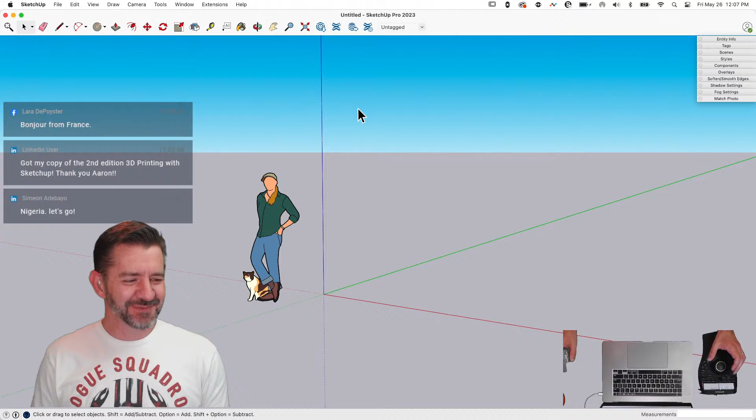So I have some imagery, 3 pictures I found that I'm gonna use as reference. I'm gonna go File, then Import, and grab this one. This is my main one, so I'm gonna import that and make it nice and big. I'll scale it in a second. This is the one I also shared on the forum, forums.sketchup.com, you can grab this file if you want. This is the main one I'll be working off of, it has all the vertical measurements and the shape of it, so we're going to work off this primarily.

I do have a couple others. Keggy just posted a picture of himself, but that doesn't help very much for modeling, though it's a good picture. You can take a picture from the needle, so we'll have to at some point figure out where inside the tower this picture was taken after we've modeled it, using Match Photo from the interior to line up that window.

So this is one of the ones I want to use, this would be the primary one. I think I'll get a lot of the geometry from this. And then I'm going to import the other one too. I'll just import all 3 of them and throw them on the ground right here. Is this guy right here.

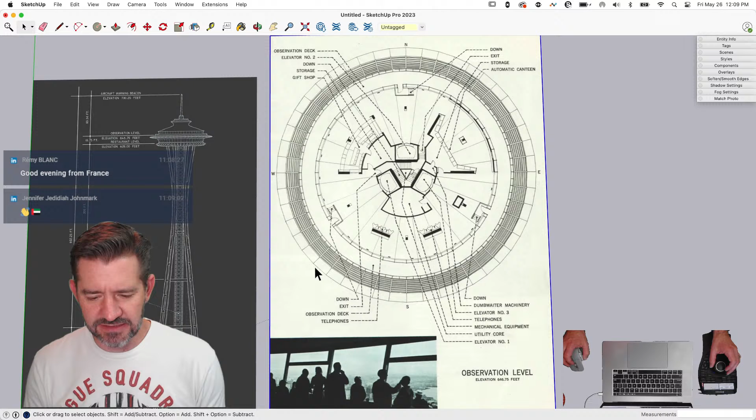So I grabbed this style, not because I want to go into this much detail, I'm not going to model the interior, but what this shows very clearly is the increments that make up the top of the tower. You can see the observation deck actually has, I think it's a 48-sided polygon, so I wanted to use that to create this geometry. What I really want to do is create a component, one slice of this, model it once, and let SketchUp do its thing.

And then it's three legs, right? So yes, literally you just do 1/3 of this. Exactly, so we'll do 1/3, and up here this will be broken into thirds, and each third will be broken into however many chunks there are. So I'm thinking ahead, I'm getting old and getting smarter, thinking about breaking this down into components before modeling rather than getting halfway into a model and somebody in the chat goes 'you could have done that with components.' I go, yeah, I could have, but how boring would that be?

Keggy posted another picture that might be more helpful. There we go, that's closer. So from there you see that little restaurant level right there, the little three-sided piece down towards the bottom. I learned that was actually added to the Space Needle in the 80s, and I happen to have a 3rd image which I'll drop here that gives you an idea of what that looks like.

You can see this was 1982, they added this, at the time it was the banquet facility, though I actually don't know what it is now. We didn't get to go in it, we looked at it, Matt and I got footage of it. I'm learning that when you go someplace to film, you end up filming instead of enjoying the place you're at. So from about 2 miles away in a park, we got footage of the Space Needle and didn't actually go there. But we did learn that while we were there, it was celebrating its 60th birthday. So happy birthday, Space Needle.

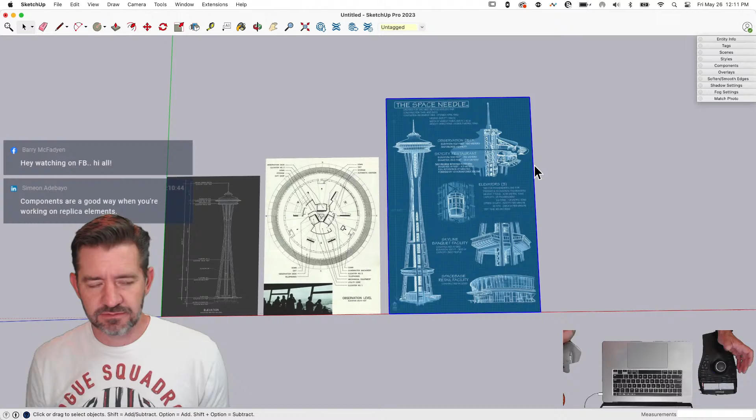Happy birthday. I mean, they have a birthday every year, so I guess you don't have to say happy birthday. No, you can say it every year. Happy 60th birthday, it seems like a big deal. Okay, I won't be standing that tall when I'm 60, tell you what.

So these are my images, I'm just bringing them in. I'm not going to do a watermark, none of these are big enough that I would want to model off a watermark. So I'm just going to bring them in, drop on the ground. I'm going to grab all 3 of them before I forget, and add a new tag called ref, because that's what I call it. I'm going to take all 3 of these and add them to that ref tag, that way I can toggle that off as I'm modeling and get rid of those images.

They don't look like the same scale. They are not, so let's deal with that at a glance right now. So this one over here, I'm not really worried about scale, it's all kind of isometric view anyhow, I just kind of wanted this for reference, so I'm not going to worry about this one so much. So I'm just going to put you over on this side. These 2, I want to get to the same scale so I can actually work off of them.

So there's no dimension here, so I'll start with this guy. So this says 602.25 feet. And that's to the tip of the needle. From the tip of the needle to, is that to here or to here? Wait, 100 plus 300 is 400.

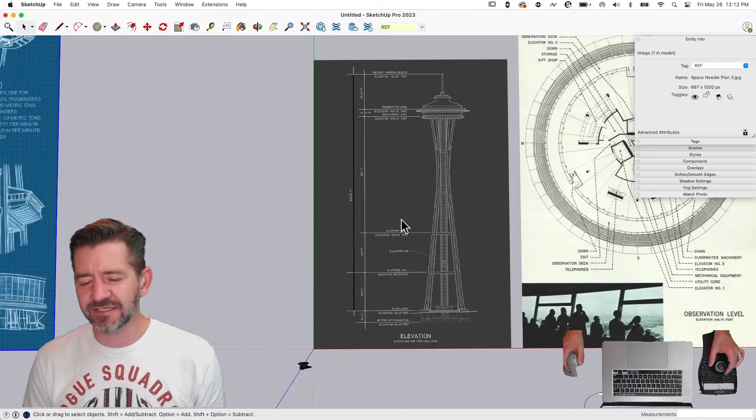Look at you doing math. Oh, so that's, they have a little dot here. This is not supposed to carry out, that's supposed to go to here. So from here, yeah, sometimes I accidentally do math and I'm like, oh, my whole complaint about how I can't do math just went out the window because I did it. Well, at least you're doing it poorly. That's true, yes, maybe. Yeah, I'm ballparking, but that was actually called estimating and not mathing. Oh yeah, estimating sounds more professional. It does, it also is lazier than real math.

So Mamba77 is wondering if you're going to do the rock and roll building next to the needle, and Kagi is also wondering if you're going to do the EMP museum. Or did you go to the EMP museum? I don't even know what that is. Electromagnetic pulse? Do you like go in there and it immediately fries your electronics, you get all that pesky data off of your working device, go away? No, I'm not going to do any of those things. Thanks for asking.

Nice, what? Thanks, this 600-foot building's not enough. Oh, all right, I'm going to grab this line I just drew, EMP actually, so I'm going to grab all this stuff and make it into a group because I want to scale this image and not everything else. So now I can come in here.

I can, what was that? 102.25 or 602.25. So I'm going to put a dimension on that edge, call it 602.25 feet. Yes, scale that group. All right, so there we go, that looks a little more appropriate.

By the way, the EMP museum is apparently the Museum of Pop Culture, now called the MoPop. Oh, I didn't get that out of, yeah, see that makes a little more sense, right? Heather's down there, right, nice.

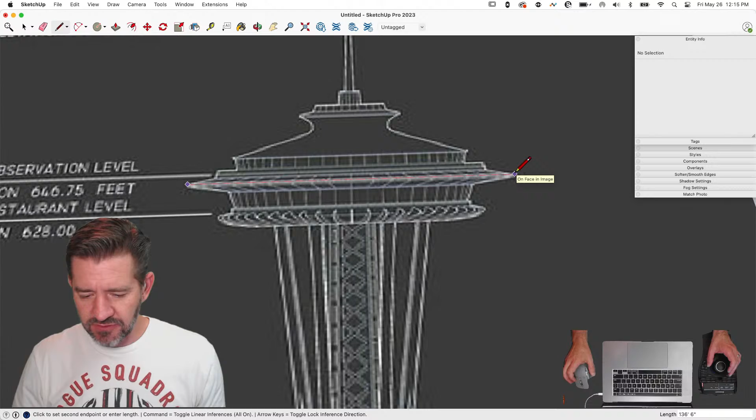136 feet across, so I'm going to come into this guy right here.

Take a line just like I did before. Was this off axis? It is slightly. Ooh, look at that. Okay, I'm not worried about that right now though. Need my edge, same thing. Grab that, make a group, go into that group, and then...

Wait, so that image shows that there's segments. It's not a perfect circle. Was this designed and built from a SketchUp model? Possibly.

All right, so if I do that and take this up here, I get a little Z fighting, but I should see... yep, same size. All right, these are the images from which my needle will be built.

You know what that means? It's probably time to do... oh, you don't have that button. I don't have that button. Save, I can try and save. I guess I could try that.

2023, to differentiate from the one I built in the past. All right, let's start doing some modeling. All right, so I want to put this on a base.

I don't have good imagery of what this base actually looks like, so I'm just going to put it on a circle that's the same number of sides as it is here, and then I'm going to break that into thirds. So if I come look at this, I got 1, 2, 3, 4, 5, 6, 7, 8, 9, 10, 11, 12. So yeah, 48 sides.

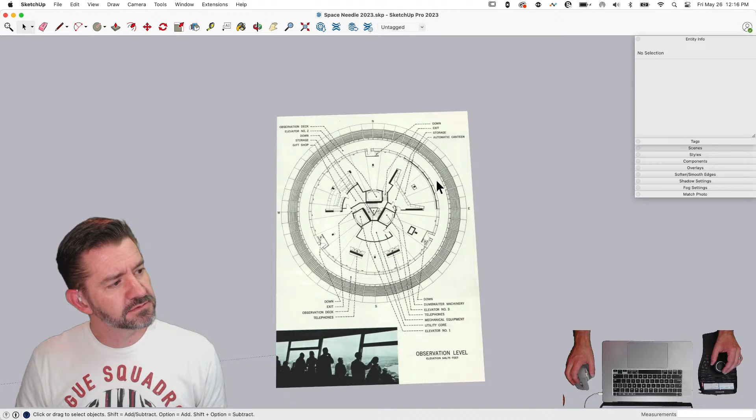That's good because that's divisible by 3, that's what I was trying to do. Thanks for mathing that at me. Well, that's just 24 times 2, so we already knew that. We're good there, right? It's divisible by... because it's divisible by 9. No, it's not divisible by 9. Man, messing me up.

All right, I'm making... yeah, it's divisible by... 16 foot edge. I'm just going to pull it over here and make a circle. It's 48 sides. Boom. Go to the center, pull it out to the edge. There's my base, that's right here.

We'll drag that down from here to about here, and then I will pull that down, I don't know, some amount. All right, not really that concerned about that, to be honest.

All right, so what I'm going to do now is I'm going to divide this into 3 sections, so I only have to make 1/3. So I'll grab this, grab from the center. I could count how many spots over that is and then draw an edge there, or I could just grab this and say, I know that 360 in thirds is 120.

And that's not math, that's just a thing I remembered. And I'll type 2x. That's like you saw it on a chart somewhere or something. Maybe my daughter's homework, or I don't know, maybe you used your gazintas went all the way up to 120. Odds are against that kind of retention, but it could happen.

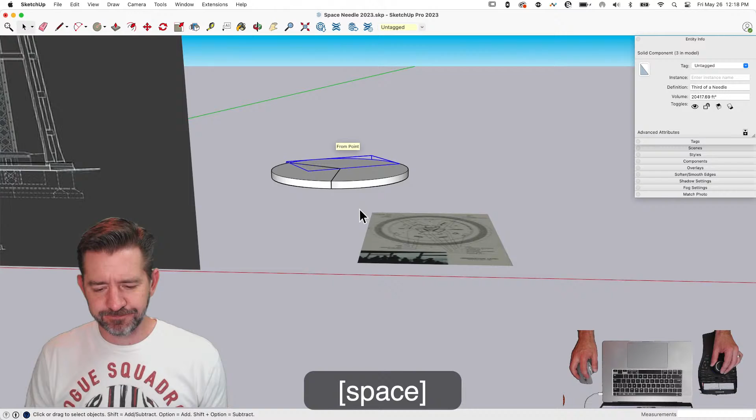Wait, something weird's going on here. It's getting a weird shadow right here that I did not like. Something weird is going on.

Seeing this part sort of detached from the rest of it makes me think of one of the Star Trek movies, where they literally separated the disc from the rest of the Enterprise. I don't remember which movie that was, though. Yeah, I do remember that happened. It seemed like a very weird design choice. It did, it was like a lifeboat kind of deal. I don't know what happened there.

Hmm, okay, all right, let's start on the middle here. So we have this little round building, and I'm just going to go ahead and draw a line across here. Grab that edge. Actually, wasn't paying attention at all to that dimension, I'm coming up with approximate dimensions. So that's about 42 feet.

So I'm going to come in here, I'm going to draw a circle like this. 42 in half is 21 feet. And then I can just get rid of that, and then raise that up. Oops, I hid the rest of the model.

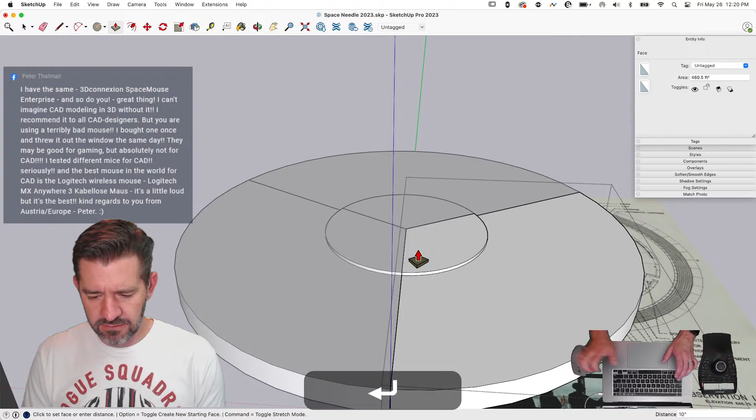Let's see, that's about, if I come from here up here, the walls come up. All right, so we'll call it 10 feet, and then it's got a little roof for another about 3 feet. So we're going to go like this, I'm going to pull it up 10. Haha, 10 foot. And then just to make that roof real simple, I'm going to offset this edge.

I do have to make sure I keep an eye on this extra geometry, because as it overlaps, this can get a little bit weird to keep an eye on, but there we go, something like that. And then I'm going to pull it up.

Well, we'll go 12 inches. Erase that, and then grab this point, pull it up. Vertical, like. Now it looks like a circus tent. Not quite that much. There we go.

So I am getting, see this shadow? When you're working with geometry like this, and you get this shadow where you shouldn't, like this is a flat surface, right? That should not have a shadow. That's an indication that something is smooth that shouldn't be. You can actually smooth any edge anywhere. If two edges are kind of meeting like this and you smooth it, you get a nice smooth surface. If you smooth like a 90-degree angle, it'll get rid of that edge, but as it tries to kind of smooth those two faces together, it'll a lot of times cause weird shadows like this. So I'm guessing that this edge got smoothed somehow.

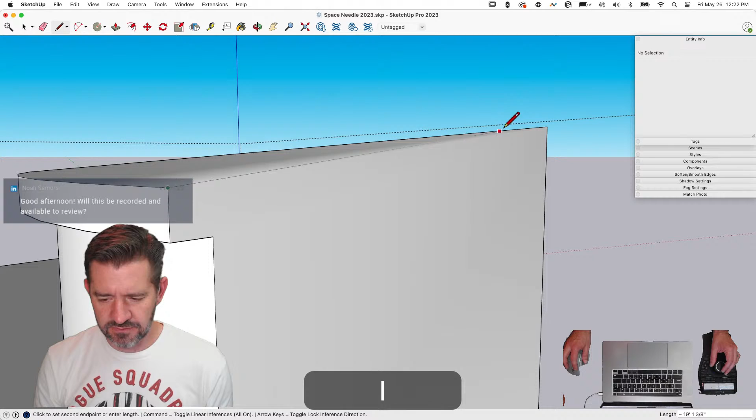And if I come over here, it doesn't look like it's... Oh, ooh, something weird happened there. That ain't right. There you go. So yeah, that edge got smoothed. Oh, there you go. Boom. Clean it up. Ah, ha, ha, that's what we want. Sweet. All right, moving on.

Let's keep going. All right, so somebody who's been there, tell me this. This elevator piece in the middle, is this square or is this triangular? Or circular? I mean, there's so many options. I think I want it to be a triangle, but I don't know that it is.

Or somebody who's good at looking things up on the internet could tell me that too. So you didn't actually go to it while you were there? I did, is that not what you're telling me? No, we did not. Unfortunately, we didn't. We wanted to. We talked about it, and then we didn't. That's the entire story. Okay, wow, it's a great story. It's really not much, I admit, but it's a story. It's my story. All right.

As we wait for some information on that - so if you're asking about that center piece, yes, the entire tower there, yes, that's what I was asking about. Is this a 3-sided or a 4-sided shape? I think it's one of those. Looking at this picture, there's too much going on to really say.

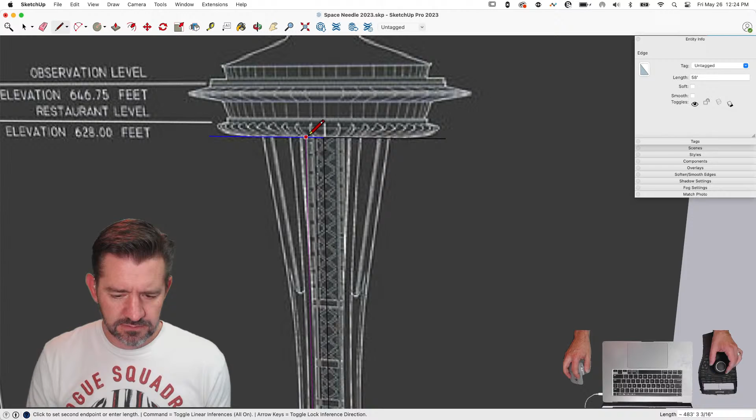Yeah, that's the hard part. Look on the forum there, there's a picture of kind of a picture shot. There we go. Yeah, it looks like it could be 3 or 4-sided from that image. I think it's triangular. Yeah, that was helpful. I think it's triangular, I'm going to pretend it's triangular. Oh, here's a better shot. Just a sec, okay, put that in there.

So I'm tracing out what I can see of this leg right here. I think that probably it's a hexagon, but 3 of the sides look like they might function as elevators or something like that. A hexagon works, that works, we can do that. It's 3 sides, but the corners are clipped.

Thanks. Hey Nate, how's it going? Nathan Trick is in the chat, and he and I went to school together. He pursued a career in architecture, and I do this. Who's having more fun? Oh, well, I mean, that's probably all subjective, right? Yeah, we probably both point at the other. Yeah, probably so. All right.

So I have this, this is tricky too, because stuff starts to get a little weird with these angles, but I'm going to do my best to copy the geometry I have here.

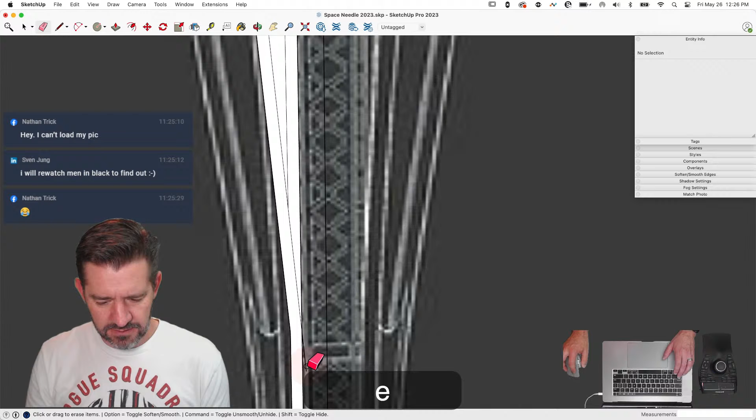Go all the way down like a dot. And this all goes away. Cool, all right, so I'm going to grab that face and I'm going to rotate it about this middle. No, that's not right. I mean, you haven't been there, so you really don't know if that's right. It might be right. Well, that was the wrong axis to rotate it about. I should have used the other command for that.

I didn't flip it. All right, there's that.

So I need to get some depth on it. Start by pulling it out 6 feet. I'll just set my working measurements to feet because I don't know that it makes much sense to worry about inches.

Grab these guys. Nope. Oh, come on. I just want these 2 lines.

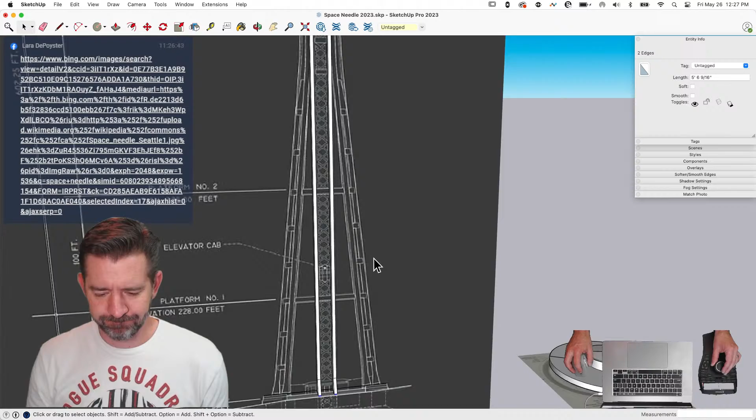There we go. I'm seeing lots of Space Needles on the warehouse, and none of them have your name attached to them. You're probably not looking back far enough. It's been a while. Oh, is that an option? I see one from the 3D warehouse staff. Nope, that's not me either. Are you the only Aaron on the warehouse? That is, yes, I am.

As in, that is my name. I have found that there's some other people who have laid claim to the name Aaron because they were born with the name. Well, that's weak. That's weak sauce. That's what I keep saying.

All right, so let's talk about what it is I think I'm doing here. I want to get as much detail into this piece as I can while it's laying flat. And then afterwards, after I kind of put the pieces in there, I want to use a tool, Fredo Scale, to do that. So I'm going to take it and rotate it so it's coming up the side. And then I want to use Fredo Scale to bring the top and bend it back out. So I'm going to model it flat and then pull it out afterwards. Let's see how that works.

I don't know, I'm making this all up a second time, apparently. Yeah, and you appear to be at this point on a completely different journey than you were. Oh, yeah? When was that? 2019, 3 years ago. Almost 4, 3.5 years ago.

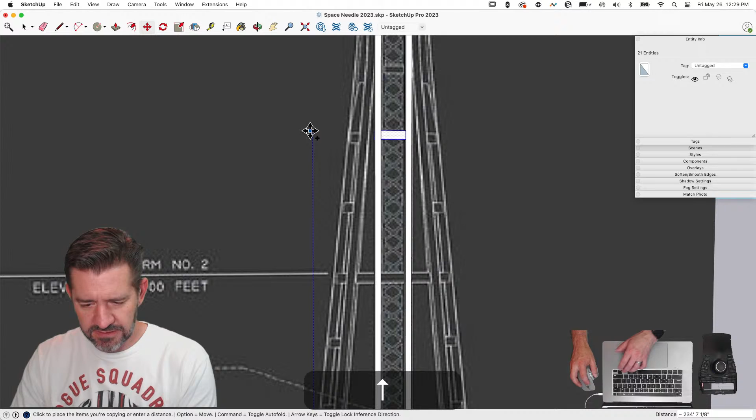All right. Ooh, apparently these are not, that was not really good. Here, let's go from here to the very top one. And divide that by 7. Oh, baby. I do appreciate when stuff works as I say it's going to work.

That is not a for sure thing. I like when you divide things by 7. 7 feels like such a risky number to divide by. Hey, because it's a prime number and stuff. Going with the number that I got here.

All right, so what I want to do here is these parts have like these kind of curves. So I'm going to do this. I'm going to draw a line across here. Stop it. Put a circle right there. Stop it.

And then I'm going to grab this guy right here, and I'm going to scale that up like that. And then, yeah, I like that. I like how that looks.

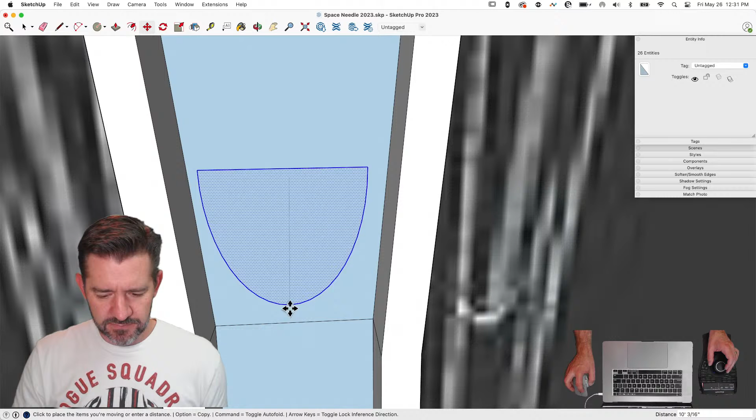Up here is going to be a little different. Let's go ahead and just copy this. Copy that. Bring it up here. Copy that, Red Rooster. Let's go a little more. Stand on axis as much as possible. I grab that, rotate it 180 degrees. Grab by the tip, drag it straight down. And then I'm going to grab this, scale it.

Let's try this. I might have to move that back down afterwards. No, it's not going to work. All right, I'm just going to do this. I'm going to scale it out like this. I'm just going to go with it. I'm going with it. Beep. Little tiny edge there. Little tiny edge there. There we go.

Eric pointed out that in your previous live model version, it took 2.5 hours. So the fact you're doing it in 2 hours, you can basically just sort of skim over half an hour worth of work. That's true. Really phone it in here, can I? I feel like that's kind of the new motto anyway, since we've moved to heading off at 2:00. That's true. Well, it's a holiday weekend too. I really feel like I've done nothing to earn that.

So, all right, I'm gonna take that. I'm gonna make it into a component. I can make it a component just in case.

Needle leg. You know, like an insult you used to call somebody who had thin legs back in elementary school. Hey there, needle leg. Yeah, that's what I called everybody. That was really my go-to insult.

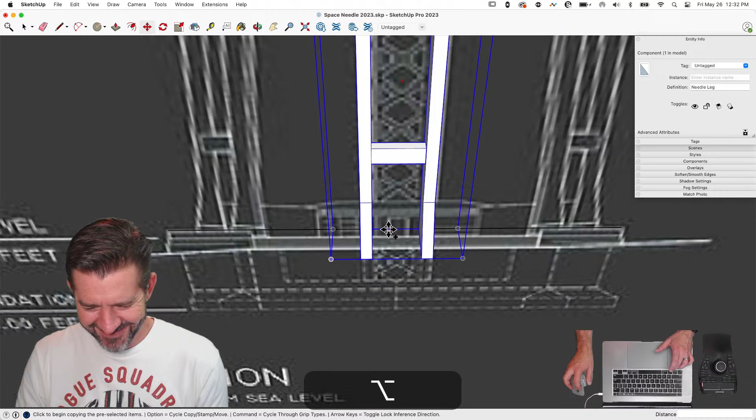All right, I'm gonna grab it. I'm gonna grab it by the middle there, and I'm gonna drop it here. Oops. Undo. There we go. I missed some geometry. Like all these little support guys here, which I imagine are important.

It's always nice to be supported. Yep. Which you need that if you got needle legs.

All right, so I'm going to copy that over here. Now, because it is a component...

Ooh, that's a big link that got put on Facebook. I'm gonna leave that to you. It's basically search results from Bing.

Okie dokie. What's interesting though is there's really only a couple of angles you can get a picture of this from ground level. It's a whole bunch of people staring up at the bottom of the disc. It's weird, it's 600 feet, right? It's big.

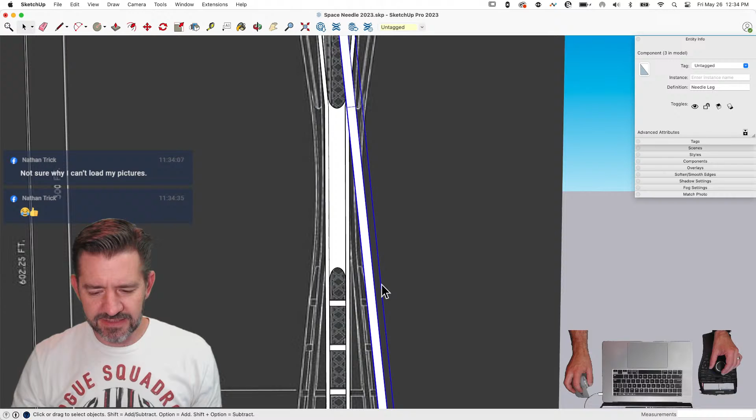All right, so here's what I'm thinking. Following that like that, now I need to, from about here to here, have it tilt back the other way. So I'm going to do that.

I'm doing this in a component, so I want to come into the geometry, select it all. I think I got to make it a group. And then let's go to Fredo 6, Fredo scale, radial bending. I'm going to tell it that I want to bend it from about here to here. I'm just going to take it, bend it out like this.

All right, I feel pretty good about that. My only problem is I don't have those other ones bent the same way. So I got some cleanup to do with my ends now, because my ends were made for square cutting the other way. But what I'm going to do is come into this, and to work on this easier, because I want to work on the geometry as it relates to the entire model...

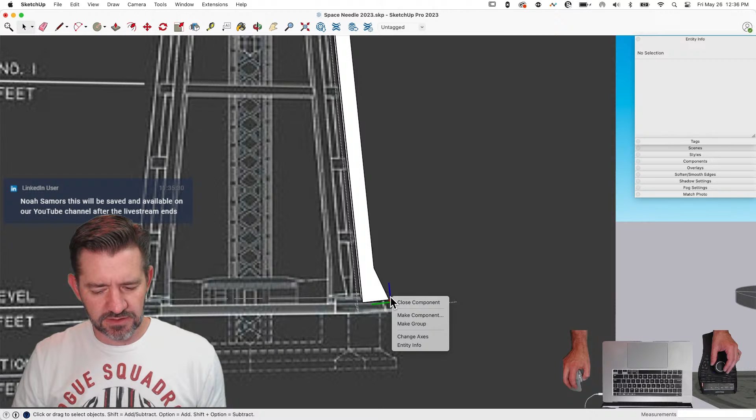So I want my axes to match my global axes. I actually click on this and I can say reset. No, actually I have to go... what do I need to do? What am I thinking here?

Have you saved lately? Do you do that anymore? Yes, I saved. I stealth save now. I won't brag, I'm pretty okay, good, like at sneaking in there and saving.

Nice. Yeah, so I'm gonna say axes. Do I have to do this? Now if I leave this, say, do you want to update the axes? Yes. And now when I come here and pick this, look, my container is upright because it aligns to the main axes. Now I can come in here and do things like grab, explode this because it's in two groups. Grab that, move that vertically down to there. That puts my feet on the ground.

Up here, I'm going to go across like that, maybe. This is gonna be tricky because this is all kinds of leaned and stuff. So what I'm gonna do is I'm just gonna draw a rectangle like this.

Let's get this away from the building. There we go. I don't know what I just drew. There we go, let's try this again. Let's put a rectangle right there. Yeah, that's what I want.

And then I can grab these faces right here, right click, intersect face with selection. That'll cut all that stuff. I can just push those over. Oh no, because they're leaning in that direction too. So really, I don't care about any of this. Delete, delete.

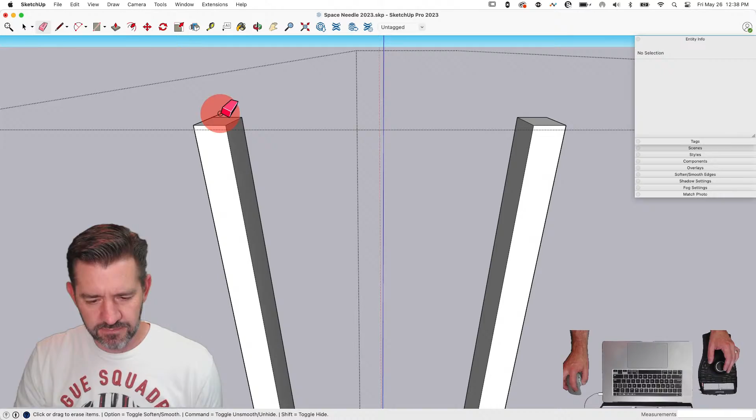All right, I wish you had a poll for this. How often does this happen to you guys where you end up modeling and you're turning your head to get into a place rather than orbiting? I know I can't be the only one in the world doing that. So don't lie, don't lie, make me feel good about myself. Tell me I'm not alone. Same with gaming, like how many times have you been holding your controller, twisting it, which I guess if it's like a switch then you could do that. But that's true, it helps. Yeah, you think somehow changing your position is going to affect it.

Yeah, Ahmad said that it happens all the time to them. Man, I guess I don't have to tell you guys anything about what I do because you all sit here and watch me do it.

All right, okay, so I'm gonna take this now, and I'm trying to figure out exactly how I want to go about placing this. I'm gonna grab it by the midpoint of the legs. I'm gonna create a throwaway piece of geometry to select by, and I'm gonna come over here.

1, 2, 3, 4, 5, 6, 7, 8, 9, 10, 11, 12, 13, 14, 15, 16. So 8, 1, 2, 3, 4, 5, 6, 7, 8.

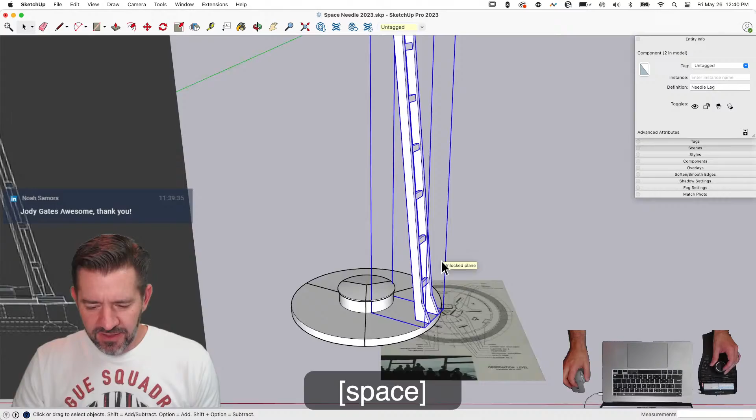What's more fun than watching Aaron count? I could think of a thing or two. Maybe watching Aaron place microchips. Oh good golly, that's a thing we should never do again, or probably talk about. Let's not talk about that. It's still educational that way - people will be like, oh yeah, I'm never going to model a graphics card that way. What not to do in SketchUp. You're welcome.

I'm sure there's a place for that. No, there's not, I lied. Don't do that, don't ever do that.

Alright, so I'm going to take this, command X, come in the context of one piece here, edit, paste in place. Oh wait, hold on, let's get the rest of our model showing first. This is for theatrics, I hit the wrong button. Tension is building. Alright, hide some of the components. Now we say edit, paste in place. Boom, look at that.

It was interesting, like when you threw just the one piece up there though - this looks like it has this taper, seeing all three pieces up, but for some reason when it was just one, it looked like an illusion, like it was more or less just straight up. Yeah, because you're not appreciating that it's tapered in the middle like that. Yeah, wearing a corset.

That's cool. It turned out really cool looking though. Alright.

Let's throw this elevator shaft in. And well, I guess we could come in here and do this.

I think once this is done, we need to go back and get the previous live stream set up, go back in, processing, have the editor go in and run them side by side so we can see where you're at in the process or how your process is different. I like that idea, sounds like fun. Sounds like something awesome for someone else to do. Yeah, we have people.

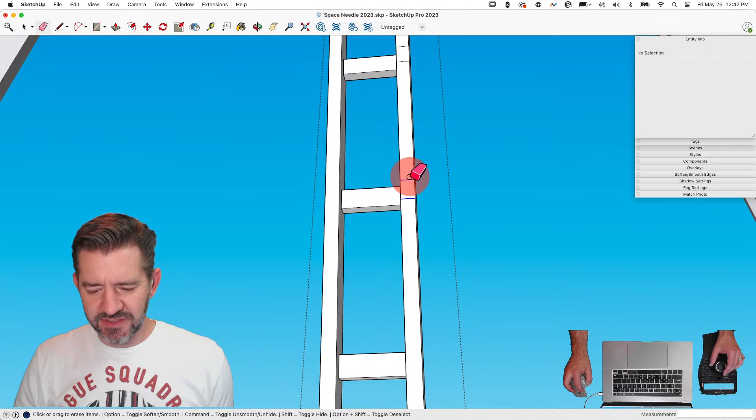Hold on, I got to do this because this is one of those things that drives me crazy. I did this because I copied that first surface and copied it up all the way up here. It's like reverse stitching. It's unstitching, stitch removal. Alright, that's enough of that.

Okay, so we do have, so this one, 1, 2, 3 up, and then 1, 2, 3 up from that. So this guy and this guy shoot across here too. So here's what I'm going to do.

I'm going to grab all this geometry. I'm going to come in context first. Grab all that geometry, option copy it and slide it on over like this. I'm going to rotate it.

60... I think, I'm pretty sure 60 degrees is right. We'll find out in a minute here.

The fun way, that's right, that's my new way to describe it - it's not the hard way, it's the fun way. Well, that didn't work in any way, shape, or form. How did I do that? How did it make it? Oh, because it's angled out. Okay, see, that was the fun way. That was way more fun than it should have been.

Okay, let's back it all up. Alright, so the problem is it's tilted this way. Legs, yeah. Oh yeah, this is fun.

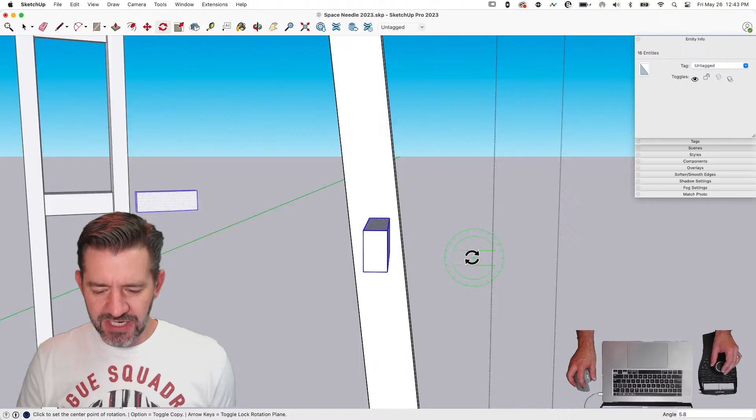But this is the issue here, is that this is geometry that... well, now I'm wondering, do I want it? Alright, let me just finish one thought for heaven's sakes. Alright, let's do this.

60, alright, push pull. What the crap? Why is that broken? I don't know, but it's great, it's great TV. There we go. Alright, so yes, that is absolutely correct, that is just where it should be. That's super duper, right?

But it does need to lay back this way. So that's what I'm kind of wondering.

So going back to the comment about doing circuit boards and stuff, Lawrence said that his first use of SketchUp at work was modeling a new device, including the PCBs. He had a library of surface mount parts, and he just placed them in the correct position using a screen grab from the PCB layout.

So he actually was paid to do that. Well, technically, so was I. Oh yeah, it's true. Well, only for a very short amount of time. Felt like a long time. It did feel like forever. I'm sorry, how long did you do that for? I got to know.

I'm going to take this and shove it back on. Actually, I'm going to make it a group because I don't want it to merge with anything. So make it a group, and I'm going to move it on the green axis.

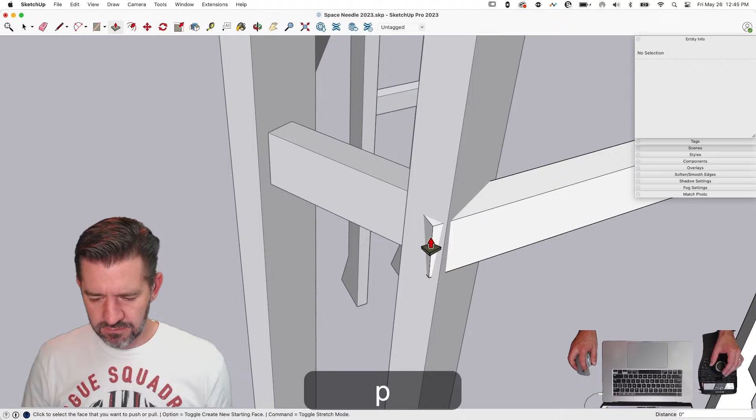Unhide the rest of the model. So it just gets in there. Boom, that is exactly what I think I want.

All right, let's move up and repeat that. I come in here, grab this. Here's what I'm going to do: I'm going to copy from this point right here, option, and go up 1, 2, 3, and place it right here. That'll put it in the exact same spot on this far side. So all I should have to do is come in, push this back into here. There we go.

All right, so we're matching up pretty good. I'm going a little quick. It's bugging me not to clean this up and go in and merge it and all that stuff, but I am trying to keep in mind that I'm halfway through my modeling time right now.

Oh, no, you've got an hour and 15 minutes. That's all kinds of time. Lawrence said he did it for 2.5 years before they started using Inventor. And Kegi doesn't want to talk about this anymore. He said we promised we wouldn't talk about this. That's right, you always drag me back into this, Jody. Because I just like to watch you squirm. Oh boy, that was rough. Yeah, so if you guys ever want to laugh, don't go watch that.

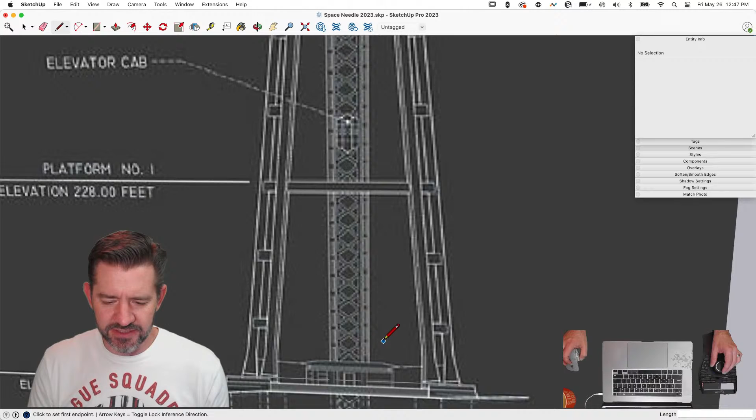All right, so I want to do something here. I would like... so this cage right here, this back and forth pieces, this truss shape I guess you'd say, goes all the way up here to the top. And you see it ends in the middle of a diamond here, and also starts in the middle of a diamond. So what I was thinking, what I would like to see is, it's going, well, I could go like this.

Am I inside a component right now? Probably, yes, the answer is yes. I could go like this and draw approximately a square around one of these truss pieces, and then take that and copy it up, option here, and do that 30 times, and see if that lines up. You can see it's off. I'm already off by half of that shape.

So what I'm thinking instead, here's what I was thinking of doing: get rid of all this. Take one edge, go from here all the way up to the top. And then take that, right click and say divide. And now I can slide this red dot so it's right about there. What I can do with this is I can slide it back and forth as I have more and more visible and see how close I'm getting. So I'm watching a ways down to see where that's hitting, rather than having to go through and count every one of those shapes.

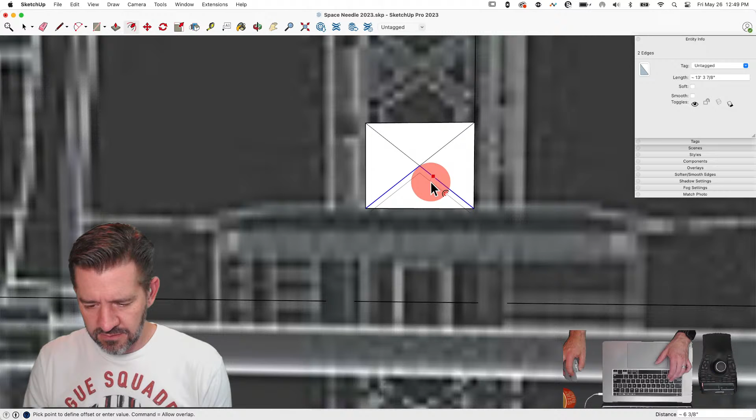I'm going to take that. I'm going to draw an edge here, and draw an edge here. I'm going to grab these two edges, offset it by, yeah, let's say 6. Grab these two edges, offset those by 6. Cool. And now I can grab both these faces and just spin around 180 degrees. And there we have one truss chunk.

All right, I'm going to give that a little bit of depth. Get rid of this. Take that, make it a component, call it the X. I'll copy that up to here, 56 inches. One more time, similar symbol. Oops, I got some extra. Oh dear, it's all falling apart. There we go, got a little extra edge there I didn't want. That was what I was trying to get rid of. All right, grab that. Option, boom, 56x.

Hey, sometimes a plan comes together. Now I love it when that happens. I got to revel in it because I've done more than my fair share of, well, I thought that would work. In fact, in this video it's happened several times now. That makes sense, that makes a lot of sense.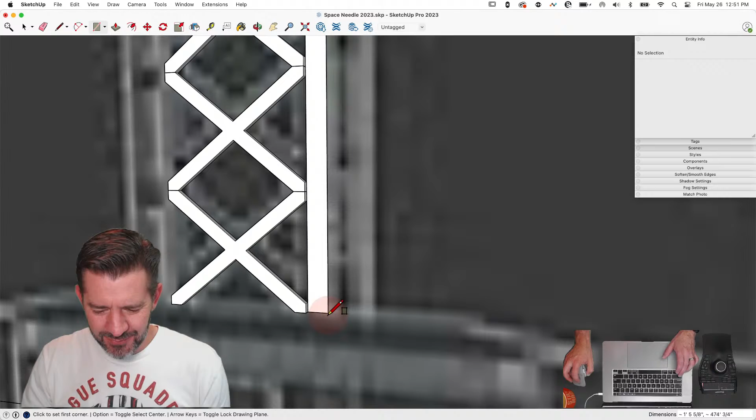All right, I'm gonna put a piece like this. Grab that while it's flat. Option copy that right over here. Almost, whoa, a lot of geometry. So when I zoom in, when I zoom way in, that's what I was trying to say, with my space mouse it gets a little squirrely. All right, so there we go. There's that. I'm gonna grab... I should hold on, scoop this. I need to go get rid of this geometry at the top because that's good.

Make group. Because this is a component, one of the things I can do is come in here and erase this edge, this edge, this edge, and this edge, and it'll make that all look seamless there. So we will take all of that now.

That's good. That little edge. Make that a new group, and then we will copy.

Come into context. So this actually falls on the opposite side, so this is going to be a little weird. Edit, paste in place. I don't know why I pasted in place. I paste.

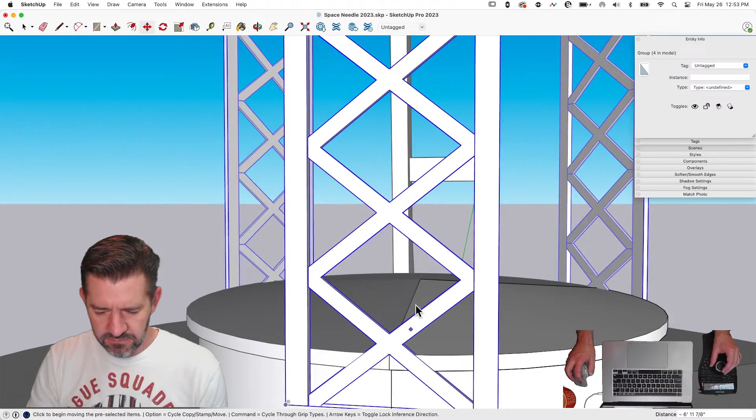Like that. And then I'm gonna slide it back along this axis, about where I think it's gonna be to create that triangle with the others. Sweet. Then I'm going to come up to the top and move it vertically so it hits this right here.

And then just so I can see the whole thing, I'm going to use scale. Where's my scale? Where's my handle? There it is.

I'm just typing numbers now. Yeah, I was gonna say this is getting tense right here. Do some math with those numbers, no ballparks. I don't do maths.

All right, cool. So that looks pretty sweet. I really want to go back and look at the other one, see where I was at an hour in.

I'm very curious, let me see. I'll see if I can do that for you. Okay, just out of curiosity.

Yeah, so that's pretty cool. I like that. Let's go ahead and get rid of this.

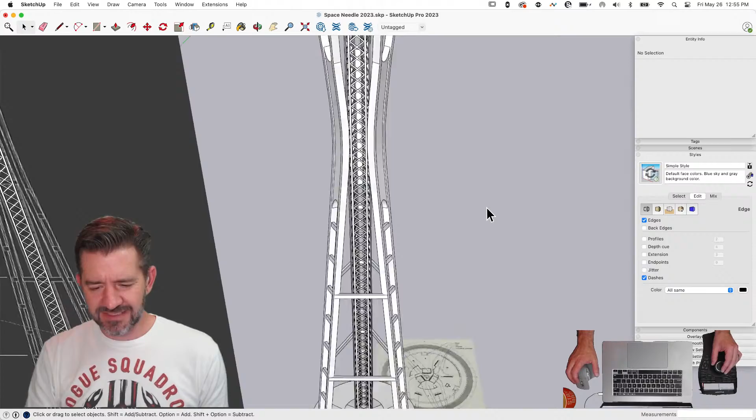I'm starting to see there's a lot of edges here, so I'm gonna turn my profiles off. It doesn't make a huge difference, but it definitely makes SketchUp quicker and snappier if it doesn't have to generate those profiles. So I tend to turn it off once I've got a lot of repetitive geometry like this.

But yeah, that's coming together. Let's switch to this. So I'm gonna put a circle.

I'm gonna be honest, am I behind? You were using up your whole damn 2.5 hours last time because you were. Let me just grab a little screenshot and I'll post it on the forum. I like it.

I'm gonna grab you at a proper 60 minutes though. Yeah, you were still working on the leg, you hadn't even gotten to the lattice yet. Oh, that was back 4 years ago. I didn't know what the hell I was doing back then.

All right, so here's the center of all my stuff. I want to put a circle at the middle of that. I already forgot how big this is. Let me check... 136, that's right. So I'm gonna just draw an edge straight up, and there you go.

136. I mean, 5 minutes from now. Wait, 10 minutes from now.

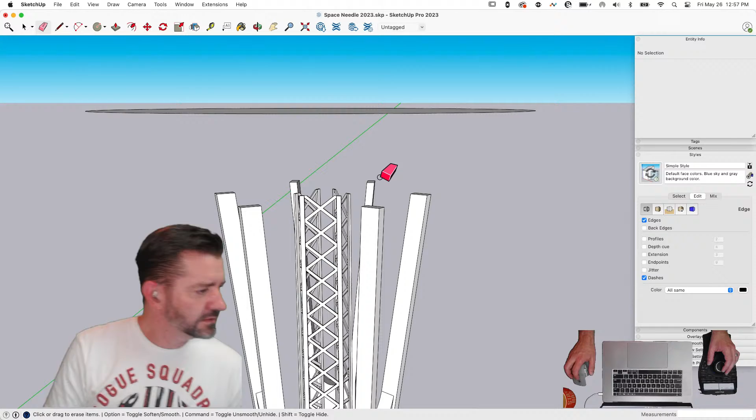Look at that dork, I know, all right? So slow, silly, shaggy hair, his desktop's brown. Is that back when you were using just a piece of gigantic plywood as your desk? No, that was actually in the old building. That was the conference table that was in that room we used to have. Oh yeah, yeah, yeah. All right.

So now what I want to do is take that and build a single profile of this shape right here that is 68 feet. So I'm going to come up here, drop straight down to here, come out 68 feet. There we go.

I'm going to turn on X-ray so I can draw on top of this pretty good. Just a little bit of a taper, so come over here like this.

This way. That's interesting, so you didn't even start working on the middle piece until 2 hours in. You're busy building the top. You spent an hour basically building the disc up top. Interesting, interesting, well played, me. My, how the turntables have turned.

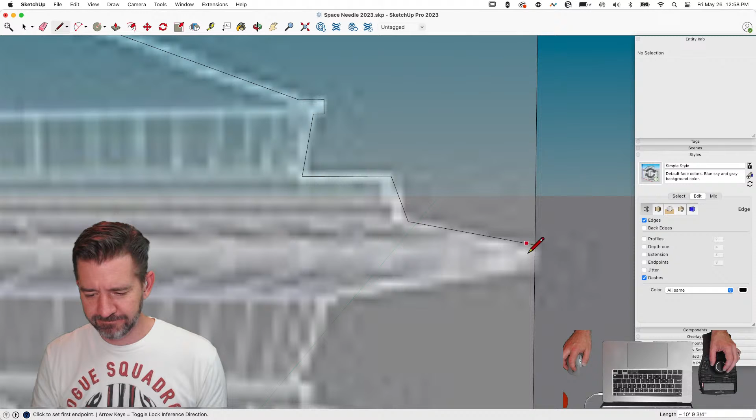I think this goes like that. And then...

All right, so this part actually has two pieces. It has ribs that go out on each part also, but the main piece kind of comes like this. This actually needs a Bezier curve drawn for it, after I save, of course.

Yeah, I don't know if this is before or after the great Notre Dame incident. But, not sure how well that Aaron saves either. All right, boom, check it.

So Notre Dame was before that, because that was in April of 2019, and this model, the Space Needle, was in December of 2019. So you were probably really good at saving then. I had the scars, I had the bruises.

Okay, so I have this profile. I'm going to make this its own group. So I'm going to grab that, make it a group. I'm going to grab it by the middle and drop that on the middle of here.

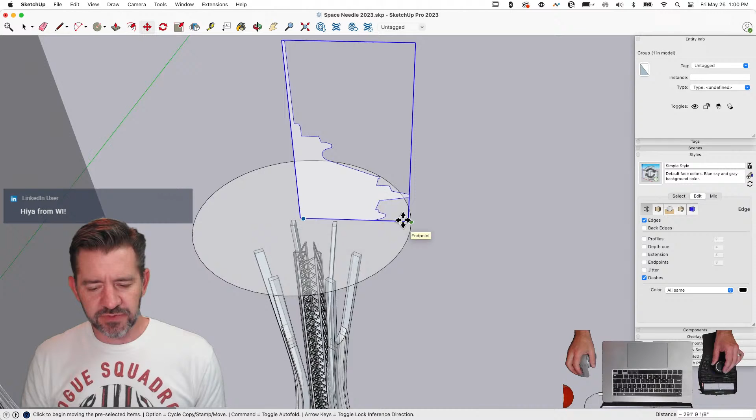Now, I don't want to just take that and spin it around because this is the outside edge, so I actually got to get this face lined up, not with a corner, but with a face. So I'm going to rotate it ever so slightly. I'm going to grab this and bring it around to the middle of one of these edges like that.

Whoops, I'm rotating the wrong group. Get rid of X-ray. There we go. Take that and move it to right here. It's a minor thing, but if I had done that, it may have distorted my geometry. But this should work good. So let's find out, let's grab this.

If I look at this, it kind of looks like a Warner Brothers witch. Remember the witch that bothered around with Bugs Bunny, that broken pointy nose. Anyhow, like every time she took off, it would just leave like the little clothespin or hairpin thingies dangling in the air. Yeah, clothespins. Yeah, that looks like - no, I don't remember her.

Focusing. All right, so I went in with follow me. This is a group right now, so I can't click on a group to follow me, but I can right click and hit edit group. And I'm still in follow me right now, so if I click this, it should just swing that around. Beautiful, everything except...

This doesn't look - that looks a little too thin. Something didn't go right there. Let me check this again. That should be right. Should. So at that top, that should be about 2 feet wide. There's really no reason to keep this separate, so I'm just going to go ahead and explode it.

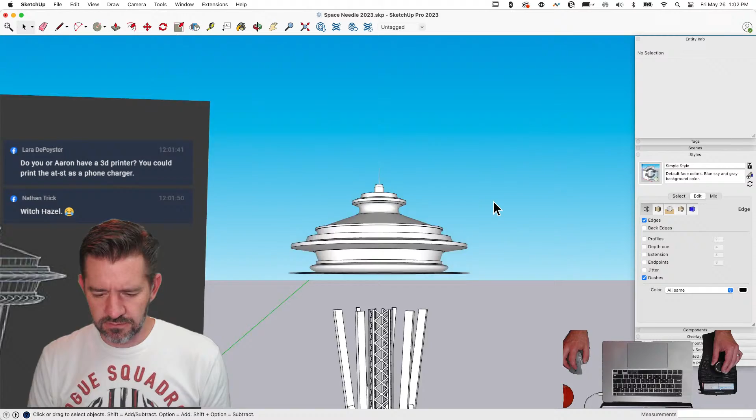Watch that again. Tools, follow me. Weird. Also lost my thing at the bottom here. Wait, no, maybe it didn't. Is this looking underneath?

Let me see what's going on right now, I don't even know what happens just now. Get rid of that taper altogether. I may have manufactured it anyhow. Let's grab this. Tools, follow me. The rest of it looks pretty good, though. Did I not have it centered?

Let's see, that seems kind of weird. Seems like it'd be the kind of thing you model in place, as opposed to follow-meing that? I don't think I had something off center because it's not. It is not the right size. Oh, but it looks good. That's the important part, that's really what matters, right?

Yeah, I'm not sure why. I feel like I'm a little bit narrower up here than it should be. 27, just out of curiosity... 30 feet. All right, so I'm gonna undo a couple times.

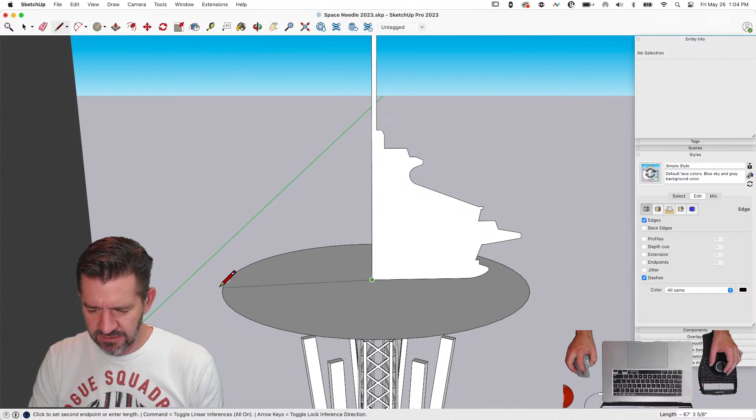Let's try that again. How'd that happen? How did that happen? You got all distracted by your whole thoughts about the witch. Or maybe that's what it is. It's witch magic, witchcraft.

That was dumb. You know, this is probably something people don't normally - I guess this is just a hazard, spending time trying to figure out why something's not working right, rather than just doing it again. Okay, there we go, done. Oh, I took the taper off of that, so let's grab that. Too many years in QA right here.

That's my problem. Let's make a group out of that, and we will just take that, put that down here. So I have an option right now: I could grab this piece, break it into smaller chunks. I think that's going to make it easier to detail. Yeah, I don't want to do it, but I kind of feel like I should do it.

All right, so here's what I'm talking about. If I come in here and I start - what would be the best way to break this out? I guess I could start deleting. That's always a safe way to - I believe they call this destructive design right here.

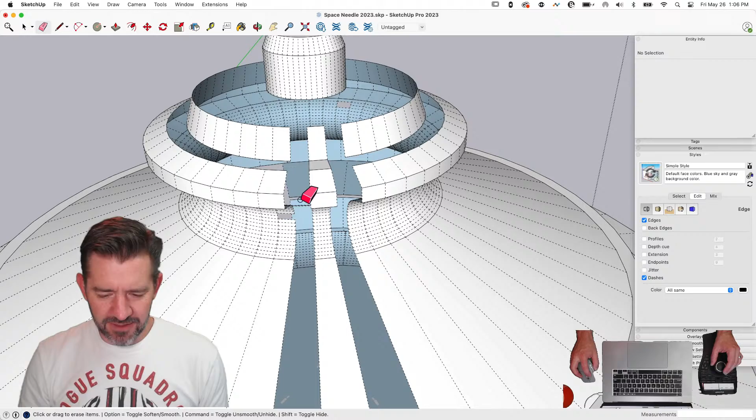Let's start destroying things, and then yeah, see what happens. See what happens, what's the worst that could happen? He says, mess around and smile and find out. That's right, that's not actually how that phrase goes, but... So let's - well, this got tricky.

There we go. What I really should have done is just followed me for a couple segments, that would have made this a whole lot easier. All right, not too bad. Come down here. The only spots that are really an issue are like this.

There's an extension from TIG called Split Donut. I don't think I have it installed, despite my affinity for donuts. That will actually break those geometries automatically, which is really, really cool. Makes it a little bit easier, so you're not in here stitching these pieces together.

But stitching, I think, is one of the worst ways to spend 5 minutes. Five minutes of stitching is calming, it's relaxing. An hour of stitching is not. Agree to disagree, Jody.

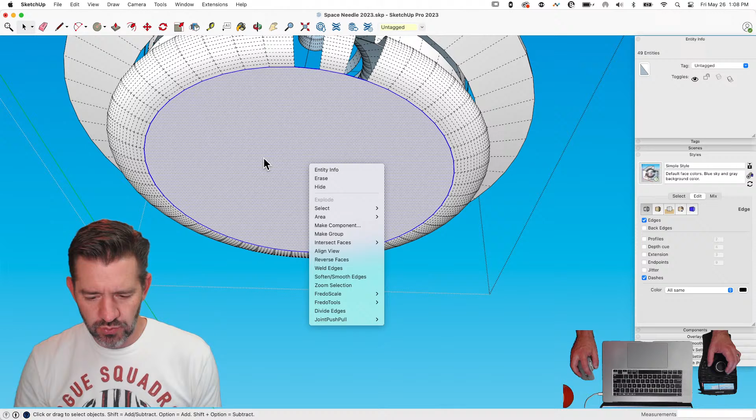All right, so let's see. If I grab this, do I have the ability to find the center of that? I don't think I can. Even if I weld it, I don't think I can find the center of it, right? Because it still sees it as a curve.

Yeah, it's gone. Now, since it's an even number of segments, if you go straight across, you could create a little... so that's when I have to do this, right? So I have to find the center again.

Let me be honest with you, I don't usually hit it on the first try like that. So, way to go me on that right there.

Same thing up here. As I come up here, I'm going to have to go find the center of this circle. So I'll come over here like this, 1, 3, 7/16ths. If I slide over 1 3/7 16th.

Wait a minute, would you say the name of that, Split Donut? Is it called Split Donut? I believe so, TIG Split Donut, or I think so. TIG has some split tools, I think they're called.

Okay, so here I'm too small, this is too tiny. They're all the same. All right, so I'm going to wing it and then clean it up if I have to afterwards.

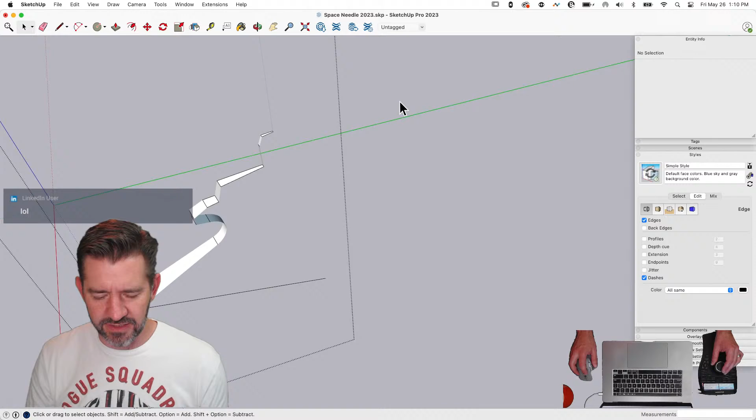At this point I kind of feel like I'm filling air because 3-year-ago Aaron is just so slow. That guy, I know, right? I seem to have misplaced a chunk that I want. What's really interesting is 3-year-old Aaron sounds a lot younger too. Yeah, I bet he's got less gray too, huh? Probably, yeah.

Still connected somewhere, there we go. Not connected here where I want to be. All right, we got a chunk. We have the chunk.

I'm going to take that, I'm going to make it a component. 1/48th of a needle topper.

Nice precision in your naming. Yeah, let's see anybody else use that name. All right, we got that.

Now what I can do, now I can take this and I can rotate it about this middle piece right here, from here to here, 47 times. And there we go, I got my thing back.

But now I could come in and add details quick and easy. So if I wanted to grab one of these, I come in here and say okay, offset this piece, I'll push it in to get that window detail. Yes, same thing here, let's offset.

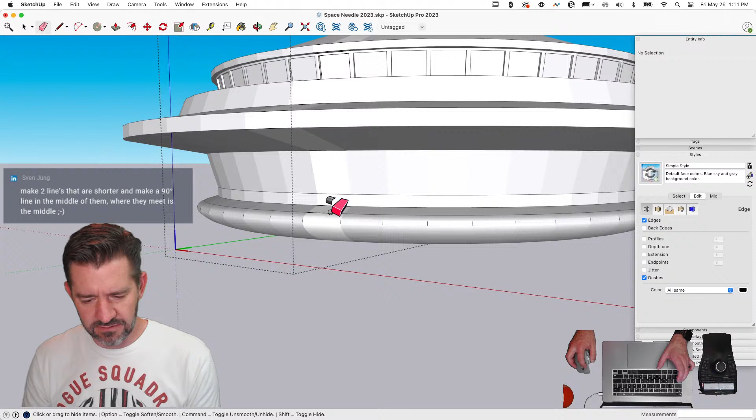Actually, let's start by smoothing this, and that, and that. Let's just get it all nice and smooth, okay? All right, there we go. Then I'll offset this.

Push that in. There we go. So now I have those windows, quick and easy.

Some spots look like they're intentionally not smoothed. Actually, I think this section is like these ribs that stick out. See that detail there? That's this right here. So we can do that too.

So we can go, see how it looks. Got one coming out, unsmooth. Rough it up a little bit. That's right, let's make a mess. Good at that. All right.

So I'm going to come on the edge here, draw an edge parallel to this, like that. I'm going to come here. Actually, I'm going to draw this edge in real quick. Take that, option copy it over just a bit like that, and then connect it back together.

Sweet. Oops, that was not what I wanted to do. I copied it over. What I'm actually looking for is a parallel edge, like that. All right, I'm going to take this piece.

Oh, I'm not in context. Let's grab that, cut that. Come in context, edit, paste in place. There we go, that's what I'm looking for.

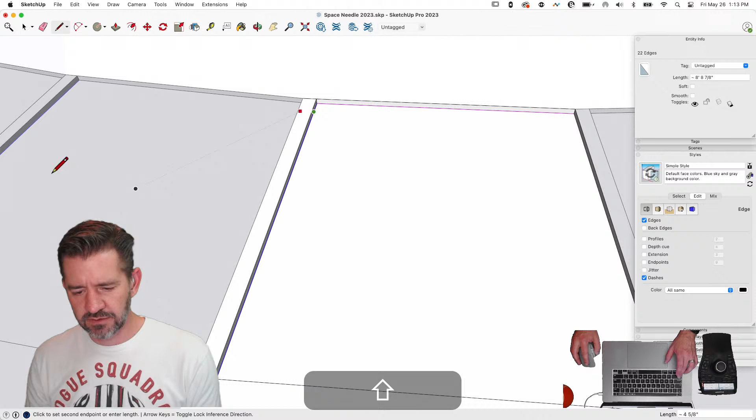I'm going to draw a bunch of edges that are parallel to this. Too long, oops. Grab that edge.

I gotta hide the rest of them off, the rest of this. Nope, that was, oof, man. Similar component, there we go.

All right, and I'm gonna take it. Option, I'm gonna copy it down to that next point, 20x. Whoa, that's perfect. I mean, almost looked deliberate. Of course, what else would you expect?

All right, I'll bring that up like that much. Do every other one like this. I'm just simulating that, I don't know. It's great. I think it might be all the way open, but something like that maybe. We got that detail on there. That looks pretty good, hmm?

It's almost like you were there. It is, I think that repeats on the bottom too. I don't really, yeah, see that? Based on the many pictures of the bottom, yeah. But there's also some sort of ribs that kind of stick out too. So out of here, right? Out of this thing? No, they're like underneath it all.

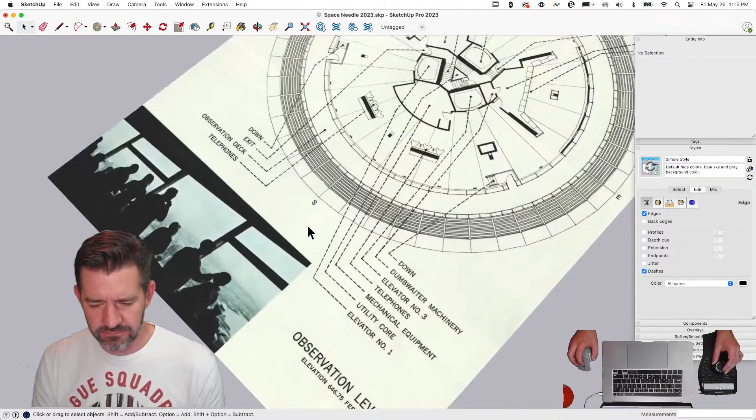I think there's a picture on the forum. Oh, these down here, yes, I have to do that too. So these guys, yeah, those. Yeah, those are speed fins. So okay, it goes quicker. I wonder how close I am to the right size where I could just take this.

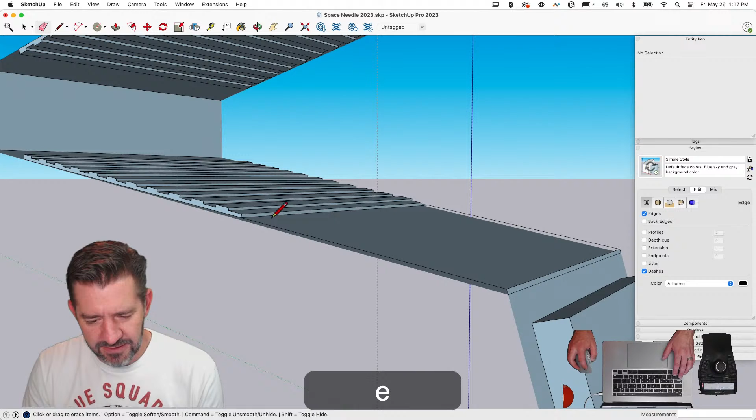So that gives me that. I like that. Nice, all right, I kind of like that. I come in here real quick.

Shift, oops, shift erase all this. I'm going to unerase some pieces up here because it looks like I actually want to see the facets here, not here so much.

Also, I don't know if anybody here has been to Seattle, but when we went, it appeared that there was like a fresh coat of bright orange paint for the 60th birthday party. The needle was looking good. It was popping against the skyline.

Ooh, how close did you get to it? How close were you? We were literally a couple miles away. Well, actually we drove past it where we were close and we could kind of look up at it as we went by. But again, we needed to film just a context shot saying, hey look, we're really in Seattle and not somewhere else. So we had to get back a little bit further. But it is a very cool building.

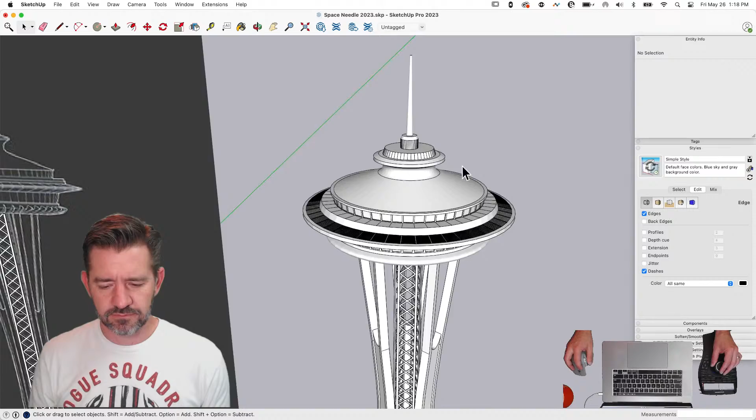I'm just going to jump in here and do a little smoothing. Smooth that edge right there. Smooth that edge right there. Yeah, that's the stuff. That is all right. Okay.

So I want to grab a section. I'm going to grab this section right here. And I'm going to take it and plop it back on the reference from which it came. Something like that, all right.

And now I'm just going to sculpt out these wings right here.

Why did that not close up? Uh-oh. Oh, because I'm totally out of plane. Yeah, you're playing in the wrong spot. That's why. Come on, man. Grow up. All right, try that again.

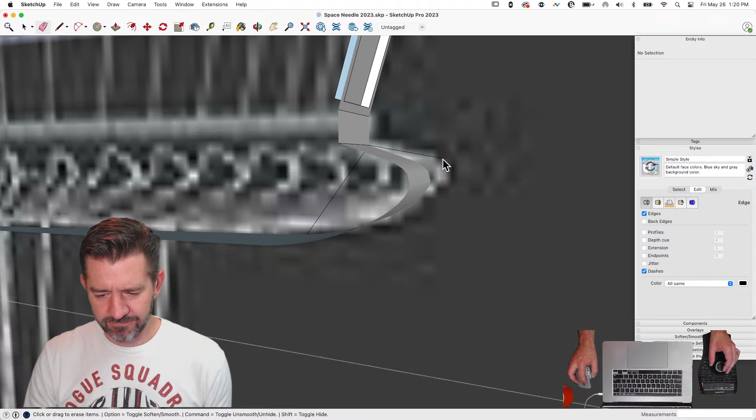Look at that, you're making all these crazy mistakes and still faster than slow three-year-ago younger Aaron. Although maybe he made a lot more errors, probably. He was not that bright. It's true, I remember him. Yeah, I can say that.

You can't. All right, so now slide this over. I can see why this is not closing. I'm still out of plane. What the heck? What's going on? Everything okay over there? No, obviously not. Let's see what's happening. Oh, am I?

So the question's been asked if you've saved. Actually no, it was a command, it was straight up a save statement. Maybe it's time, maybe this is a good time to do all that. All right, I'll take a break and save. All right, back at it.

You know, I was actually thinking about that, because somebody was saying quit saving, the process of saving. No, not Siri saving, I don't understand why what I said sounded like that. Oh well, all right. Thanks, Siri. Take that, the process of saving. Yeah, what were you thinking?

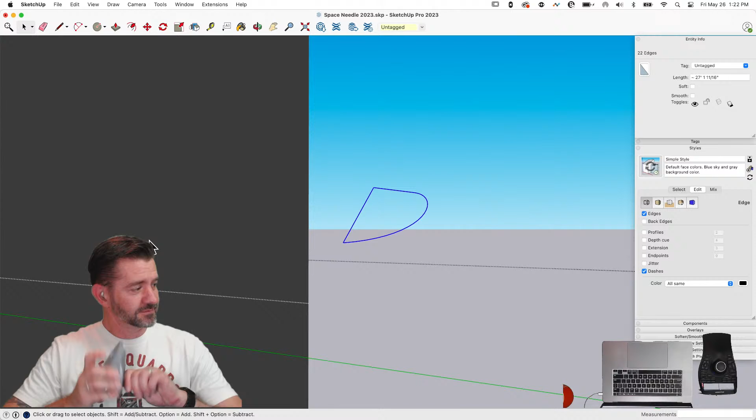How writing to your hard disk used to not be necessarily a quick and easy thing to do. Why is that still out of plane? I don't know, maybe you're distracted. Maybe your desk is lopsided? Oh, that's probably it, I got some risers up on my mice. No, I don't know what's going on here.

Unfortunately, I'm drawing this in like the worst possible way. I don't actually need this here, I don't need you. Let's try this, let's just do the whole thing again. So I'm gonna start here, I'm gonna come down like this. I'm on plane, why am I in context? What am I in? Oh, maybe that's why.

Let's get rid of all this, I think I'm working on some other axes. Just draw this flat, not in context at all. Drop that down to here. Now I'm going to draw my Bezier, it's going to go from here to here. Pull out something like this.

There we go, and then I'm going to take that, copy that, come over to one of these. See how close this is. Paste it, totally different angle. That's cool, that's cool, I can work with this.

I'm going to make it a group temporarily, and I'm going to grab that. This goes right here at this point, and then it's going to rotate from the flat. This edge right here is going to end up on this edge.

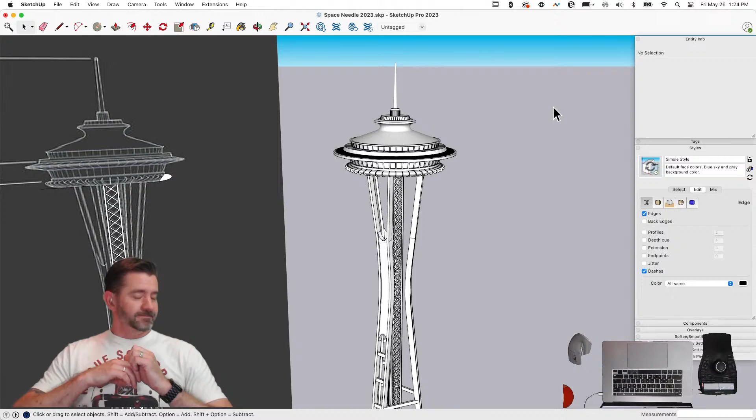There we go, oh look at those fins! Oh, looking legit. Oh, I think they're out of plane. I'm just kidding, it's just fun to say. Almost came through the internet. Dove through the meat, why'd you... Total Homer Simpson moment. Absolutely.

All right, let's chuck a banquet hall up on here. This thing right here, look at this guy. So this just sits right on top of these pieces that we already have. Hey, save. Save, sits right on top of that.

By the way, you're using that same blue reference file from three years ago. This one? Yep, awesome. So that dumbass isn't all... I mean, that guy isn't all that bad. Sorry.

It was insulting me though. Is that really something I have to worry about? Is that inappropriate? I don't know, anyhow, moving on. I feel like self-deprecation is okay to a point, but if we're worried that you're taking it too seriously, we have to take a step back and just breathe. Fair enough, all right. Or maybe you can call your old self stupid, as long as you're acknowledging that you're a better person now. That sounds good, I like that.

All right, so this is about a third of the way up between here and here. I'm just going to come to like there, and come across. I'm getting some rough geometry in that I can use to pull around with scale.

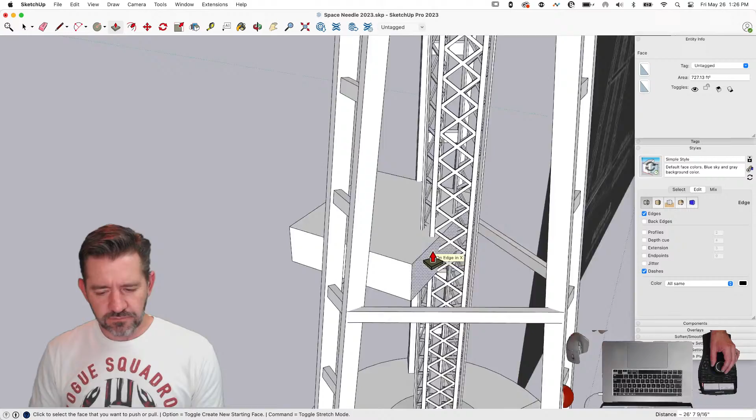This is not like a definitive best practice kind of thing. This is more just how would I go about getting approximate geometry in here.

Same thing here, so I'm going to push this back about there, and then right about there I'm going to drop a line vertically. And then I'm going to take that and rotate it at that point.

That was kind of cool. That was pretty, like I got that mass in there. Not quite sure how. Let's pull it back a little bit here. Push pull, please.

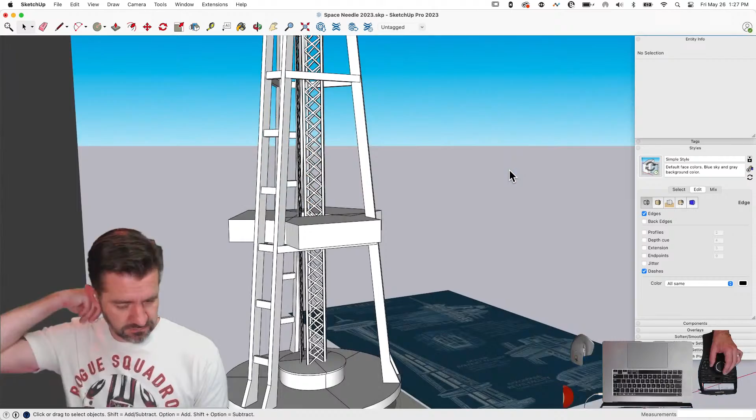Move, all right, move. So Alejandro just popped up, and I wanted to give a shout out because I saw his new plugin, his new extension, so I figure it's worth calling out, saying hey, that thing looks cool. Yeah, it looks very cool. There's some sweet plugins coming out in the near future. I'm excited, we've got a new wave of plugins coming out.

All right, so I'm seeing how this overlaps right here. I think what I want to do... I need a shortcut apparently for hide similar components, because I've never had this issue where I need it so much as I do lately.

Well, it's nice to see that there's new trends happening. Maybe the old you had something that new? No, because then he'd probably already be done by now. Told you that guy's not all that bright.

All right, I'm just still roughing in geometry at this point. Get my geometry to all line up on all three sides, for no particular reason, just because it looks nicer. A little more here, a little hangnail right there. All right, so there we go. We got the roughed-in geometry like that.

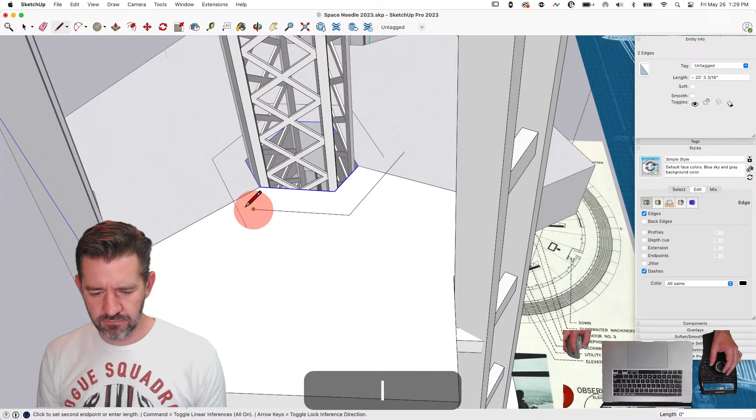It's funny you mentioned roof on first, because up there by Sunset Pool they tore down some huge building, I have no idea what it was, and they're building I guess a new water tower. They literally put up the entire scaffolding, and it appears they're building the roof and then going down from there to build the thing, which is the weirdest design decision I've ever seen. I used to, back when I would teach building design, always joke about how the nice thing in software is you could start at the top and work your way down. You could model a roof first, then put a building underneath it. If you're tracking gravity loads, making sure the building supports itself, that's kind of a nice way to do it, because you're working the same way gravity is -- put a wall in, then go underneath and support it. Very rarely does that work out well in the real world, though. And I need to probably drive by there every day just so I can see the progress, in case maybe I'm just wrong. But I look at it and it looks like a roller coaster, because it's all just scaffolding. I'm like, what is happening here? It's been up like that for almost a week, and I'm still confused every time I drive by it.

But maybe there's people here in the crowd who make water tanks for a living, and they can explain why they might be doing that classic top-down water tower tank design. Yeah, that's how we do it.

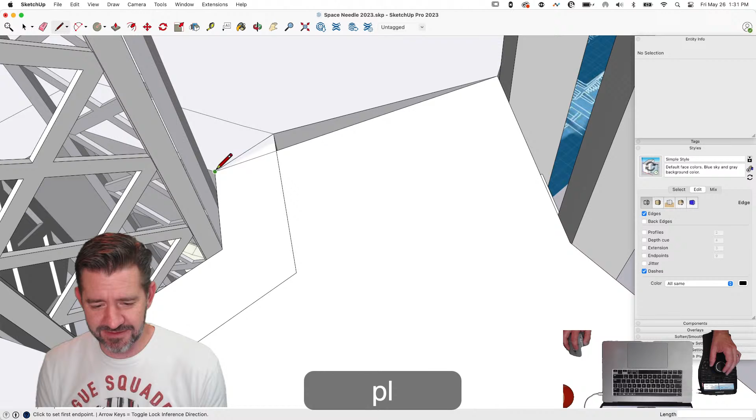All right, there we go, that's what I was trying to get to. Speaking of top down, I kind of did exactly that -- I did this quite backwards.

All right, so what I want here... there we go. Yes, now I'm going to push pull this up, and then I'm going to put some roof on.

What? Don't start with me. I'm not. Oh, okay, yeah, that makes sense.

Come on, geometry, come on, accurate geometry. Why are you being difficult? What's going on with you, geometry? We used to be friends. It's kind of hard to tell exactly what's going on here, but I'm gonna take a guess. I'm gonna make some things up is what I'm really going to do.

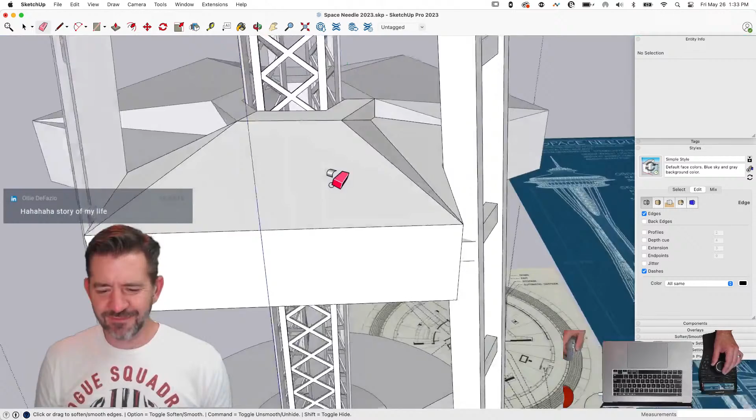Actually, I'm just gonna start with this. Start here like this, up to here. I really prefer to just always model components with them arrayed around like that, so you get to see kind of the magic happening in the background. It's definitely fun. And then if you have the option, using autofold like this is a good time right here.

For years, whenever we would go to trade shows or conventions, someplace where we'd be showing off SketchUp, there would be people new to it. You'd literally draw just a basic box and use push-pull to pull something on it, and it was like watching fireworks. You'd always get people to be like, ooh. It was probably one of the highlights of my SketchUp career, eliciting that response from such simple modeling behavior. Totally agree. That's always a fun time.

Yeah, I'll be honest with you, I started just playing around and kind of stopped paying attention to what I was doing. I don't know what this is. What is this mess I have made? Oh my gosh, hold on. Scorched earth time, I gotta clean this up. We gotta get to something real.

I feel like Keggy's comment is very appropriate. He said, is the elevator going to have an issue getting past that bit? Well, here's there, I got an elevator bay right here. But possibly, maybe so.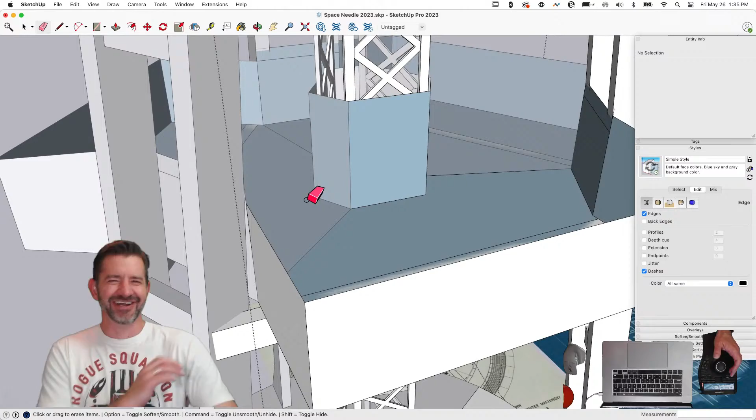All right, we're just gonna close this up. Sorry, I really apologize, I'm just like drawing things now. Oh, okay.

Pay attention, sometimes that happens. I don't think that you are alone in that, sometimes you just start playing with the what-ifs of what you're doing. Yeah, honestly, if I'm being quite honest, it's one of the things I like about SketchUp, it's pretty easy to just go in and goof around, make a mess, and then come back to reality later and make it happen. On the side, where's that from? All right, anyhow, any old way, any old who. Yeah, all right, good times.

Good times, all right. This line is on the red axis, this line is not, okay, that's my problem. There we go. Because that now should get me a closed plane right here, which I can extend out either direction.

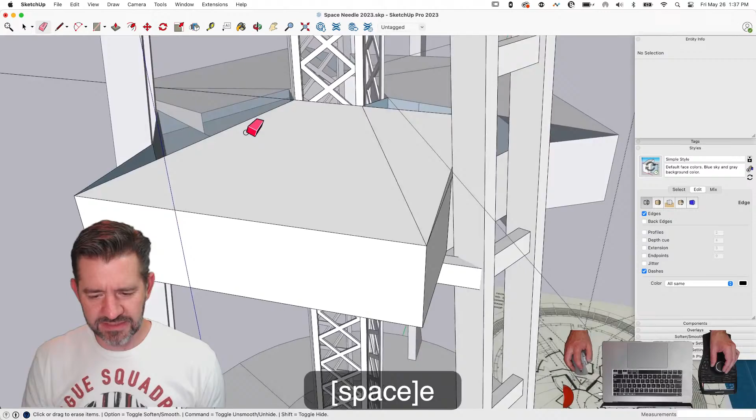I'm just gonna go somewhere around here, bring that straight up, back over here. There it is, that is the slope I'm looking for. Keep that way, all right, and that's what I want. That took a little ways to get to, but that was all I was looking for. Took the long way around. Yeah, but again,

Going back to the old days, doing building design and that kind of stuff, I think it's kind of nice to have the ability to go in and just muck about, I guess you could call it, just draw stuff. I guess somebody can call it that for sure. Yeah, well, I guess I just did. So yeah, I was there. I heard you, yeah, that was me.

Yeah, and then of course you always have the option to hit undo an insane number of times. I don't actually know what this roof looks like, but I'm making stuff up. And, sweet.

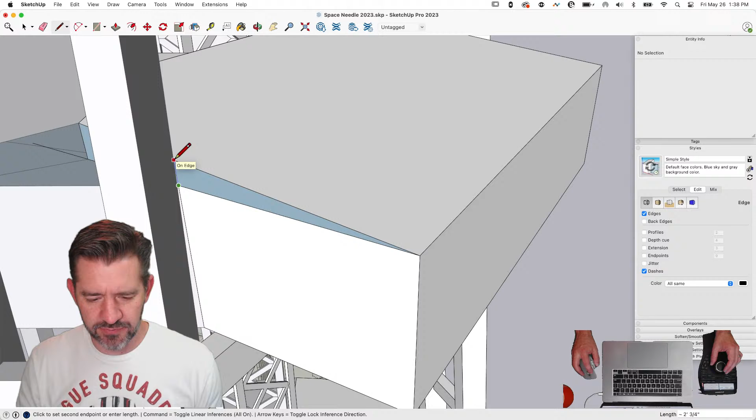So this is the problem I run into with components, which is figuring out which line belongs to which component. So, missing pieces. Go straight up, and then in the middle here. Where's my midpoint? Where is my midpoint? There we go, straight up. Take that back to, let's hide the rest of the model.

All right, let's get rid of everything else. Oh, that's why, so I have the bottom over here. So that is the one danger you run into. Trying to, where am I at? 140, okay, I need to wrap this up, this has me done.

Yeah, build an elevator, you want the car? Come on, that's boring, right? Oh yeah, maybe, I don't know. There we go.

Why is that not closing? Right, I can't, I used it up.

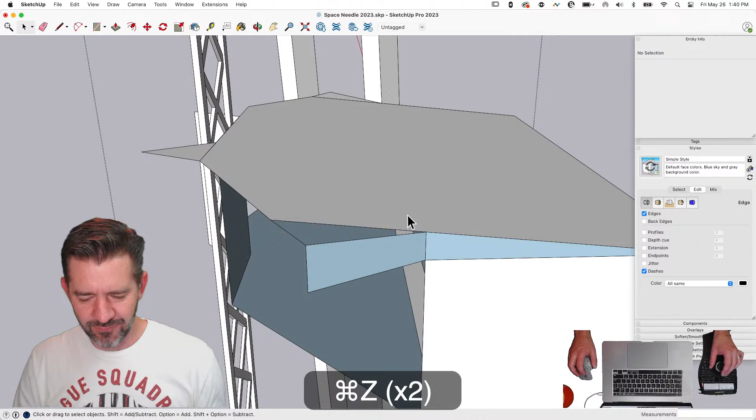I was going, well, I'm sorry, I don't feel like you're using words right now. I'm not, that was full on baby grunting right there. It was very much so. Why can't I get a rectangle here? I want a rectangle because it's a triangle, first off, three sides.

Whenever I have this problem, I start stitching like this till I identify the problem, and then try just redrawing a smaller section. Well, that stitched one part together and lost me the rest of my roof. All right, I'm spending way too much time on this, hold on. Let's make a group, all right.

Grab these three. I don't know if it's my headset or your stupid microphone thing, but you keep getting quiet and then all of a sudden it catches back on. That's probably just some mumbling and complaining noises I'm making.

It could be. Maybe it's auto censoring your gibberish. That's probably it.

So let's come in here and get some details on this thing. This gets pushed back like this. This gets an arc, actually this gets a Bezier. The windows kind of go like that, and those actually carry back here too.

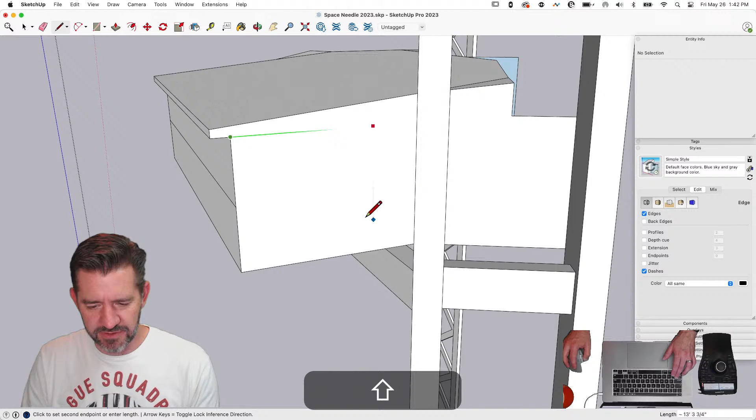Parallel that. Oh, that is parallel. Goes back like that. I'm gonna push these windows in just a touch, just a touch.

And now we have that kind of comes down and gives a little swoopy underneath. And then we have some more fins, so I'm gonna do that with a Bezier.

Bezier curve. Come into context because I'm smart. Bezier curve from here.

Right. And then 1, 2, 3, 4, 5, 6, 7, 8-ish fins.

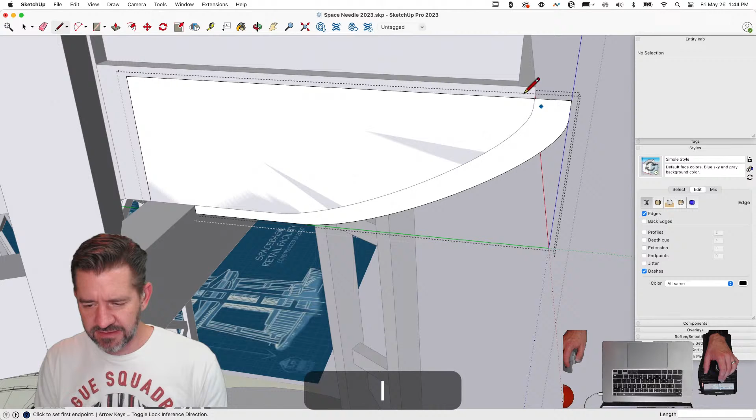I'm going to trim that, like this. There we go, and deselect all that. Grab that line, copy that up here so it's the same spot. And then I can just cut out everything except for that section of fin that I want.

And give it a little bit of depth. Oops, I'm going to weld it first. Grab all the curves and turn off the spots that are straight because I don't want those to weld. Right click, weld edges, push pull that over, something like that. And I'm going to take that and move it in.

Grab it, option. Keep you guessing there, I guess. Put that right there, I guess. I'm going to divide that by 7. Gives me my fins. There we go.

So I might go a little bit further and come in here. Let's see. Offset like that. Grab edge like that. I'm going to take that.

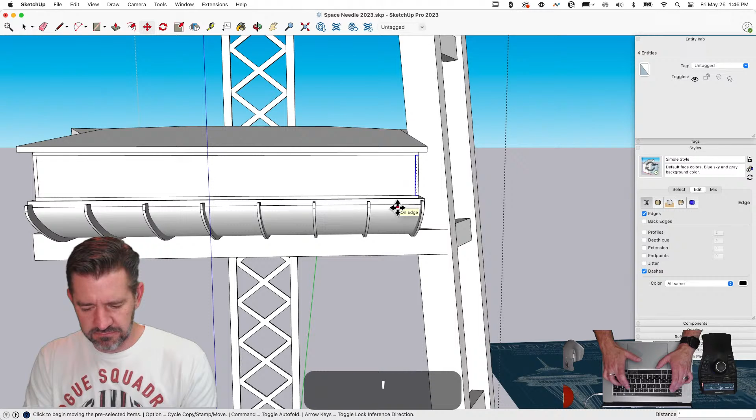Option copy that straight over here. I'll divide that by 10. Try that again. Option copy that bar off the end. Divide by 10. And then just take those, scoot them in.

That's too far, that'll hit the guys on the other end. We'll do the same thing over here. Pull this down the same exact size. Trim this geometry, grab it.

Option copy it over to here. Divide that by like 5, maybe? 4. There we go, same push pull. And unfortunately, I didn't make this - I don't know if I could do that, but I'll do that one last time on the other edge.

Just so everything looks the same. 5x4. Push pulls, push pulls, push pulls, push pulls.

All right, I'm calling it. An hour and 47 minutes, nice - 45 minutes faster than the previous version. And the previous version, I don't think had quite as much going on with that middle tower. Or maybe it's the same. No, maybe it's the same.

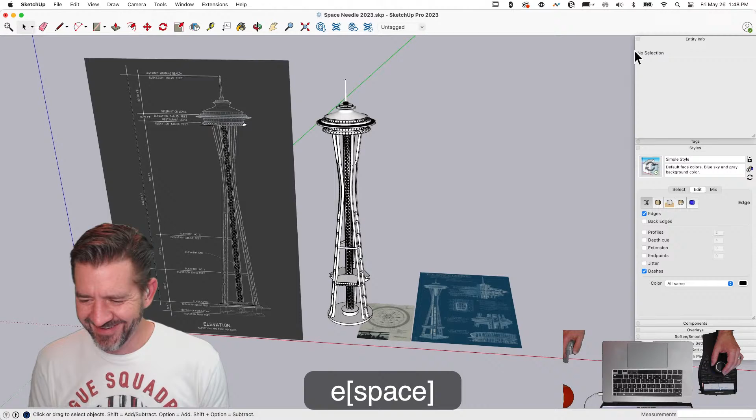All right, and I'm gonna go run into my tags, turn my references off, clean up my graveyard. Tyson.

You know, some guys like to leave a bunch of stuff like that laying around, but I choose not to. Not to point any fingers, but somebody named Tyson Barchner - that's the guy.

All right, I'm gonna grab all this, all of this, make that one single group. Grab that and drop it right here. I'm struggling with my snap points today.

Mercury's in retrograde or something like that. Stupid retrograded Mercury. All right, Command S. Now, last step.

Let's hop on to the old warehouse and let's see what yesterday Aaron was up to all those years ago. And I think I can find it because I think I called it 'as modeled live,' so I think I could call it the Space Needle Live.

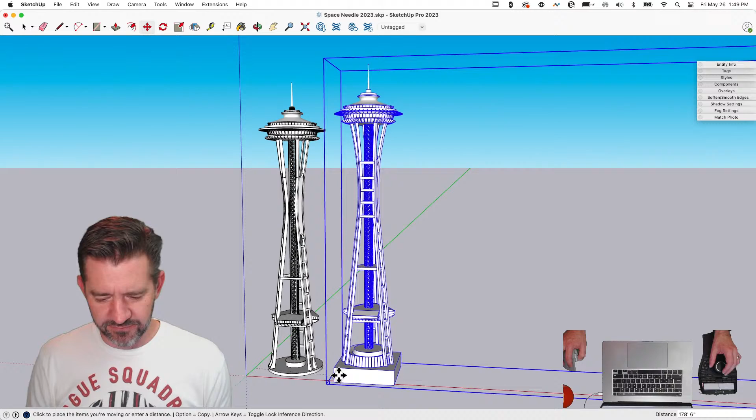Oh, you think you're cool because you got an extra base over here, huh? What? Tyson! Look at you, you have a graveyard, dang it. All right, I'm gonna...

Okay, I may have paid more attention to what was going on at the bottom then. But let's drop this to about that same height. Nope, that was not what I wanted at all.

Okay, interesting, that's about the same height. Pretty close. Well, look, if you want to talk about issues with the elevator, that's not going anywhere, no windows. What did this guy even do for 3 hours?

I feel like you had a different co-host and they probably just distracted you, so it's the co-host's fault. Oh, I didn't put these pieces in. There are supports that go across here, and ties that go in there. I did not get in.

Okay, this is cool. These little bars rather than this. I don't know which is more accurate, but it's different.

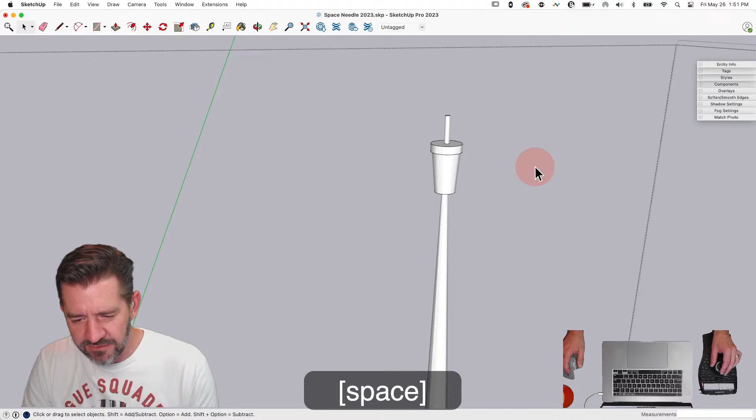Or a cup. If you were to take this and just grab that geometry, which is in here somewhere... there we go. Grab that geometry and just scale it like this - it's like a large drink from McDonald's or something. Actually, this is probably a stir stick, and this is a venti latte. There you go, I mean, Seattle, yeah, the home of coffee. That's right, isn't that where coffee was invented or something? Little Mermaid, yeah, it's where coffee stores were born.

Well, I feel pretty good. I kind of like what came out of this. This is pretty cool, in an hour less time than last time. Pretty crazy, I'm not going to complain about that at all. Maybe back then you had other stuff you were supposed to do afterwards, so you're like, I might as well take 3 hours to do this. I don't want to do my expense reports.

Let's model some more, I'll drag my feet while modeling this Space Needle. Pretty cool, some of this stuff's pretty. So I did a full hexagon for that middle piece. Some of the stuff is pretty. I don't know how I made these pieces though. Yeah, well, they did take a lot longer back then.

Cool, well hey, that was fun, hope you guys liked that. It was a good model in the end, good stuff. I'm gonna get rid of this garbage - there we go, let's celebrate the good stuff.